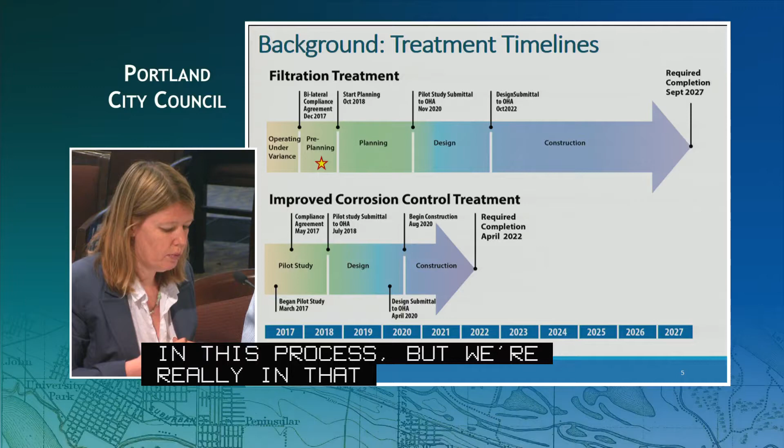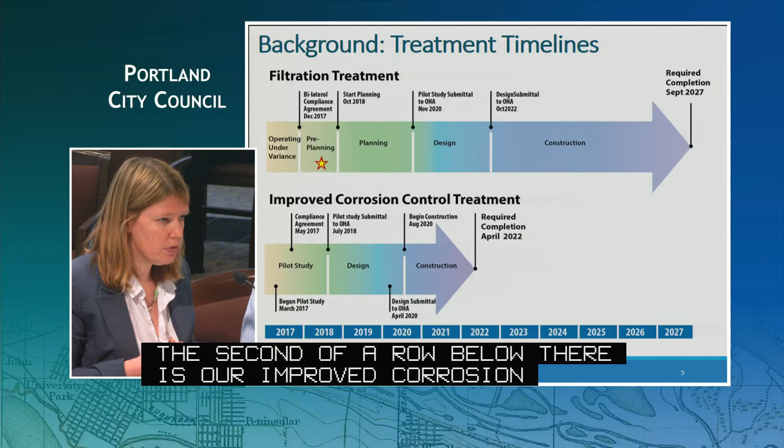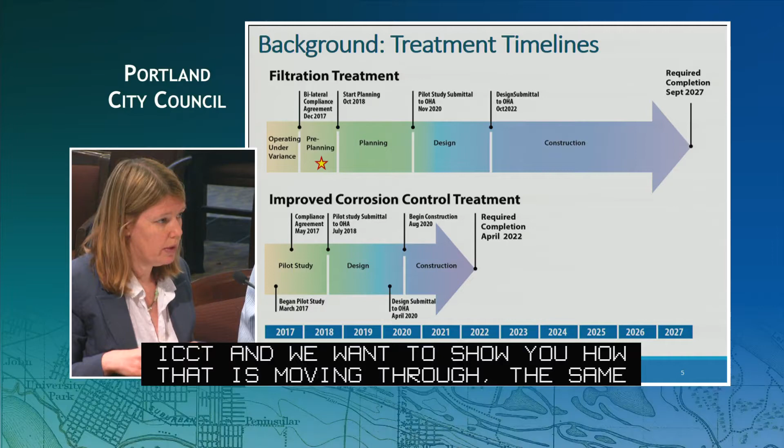The second arrow below there is our improved corrosion control treatment. We usually say ICCT. We just wanted to show you how that is moving through the same process, as a pilot, the design, the construction, but that completion with our compliance agreement is April of 2022. So the two are moving in concert.

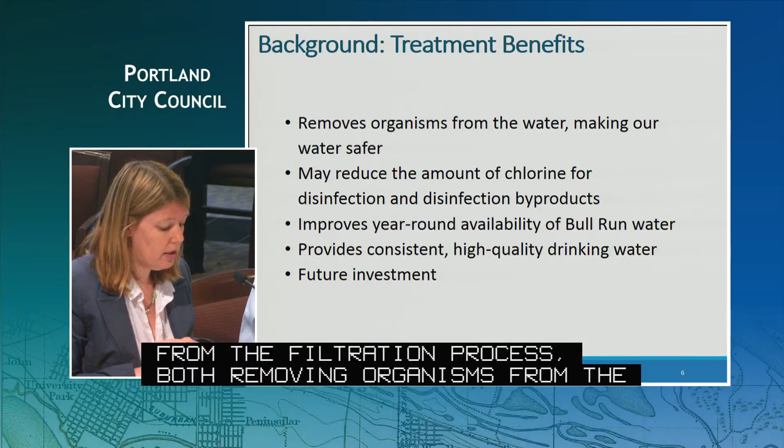And we'll go forward. Again, just a little reminder on the next slide about the treatment benefits. So yes, we are complying, and that is a huge reason why we are moving forward with filtration. But as the council considered last year, there are also a number of benefits that we get from the filtration process, both removing organisms from the water, but also the amount of chlorine that we may need for disinfection, and then as a result, the disinfection byproducts.

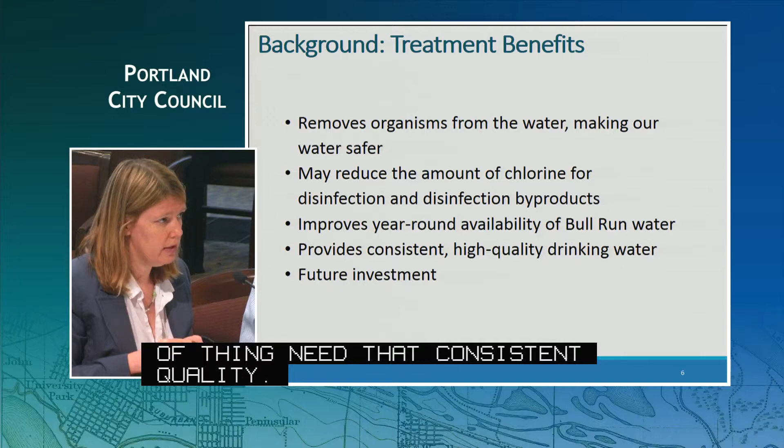We're also looking at filtration. It will improve the availability of Bull Run water. It won't make more water. We want to be clear about that, but it will allow us access more of the year during different conditions. And the consistency of the water, which is important to all of our customers, but also to a lot of our high volume customers who use this water for chip manufacture and that kind of thing need that consistent quality. And it's a future investment, and as the mayor said last year, we are looking at a longer time horizon than with any other treatment option. So that's what brought us to the filtration option.

Now I just wanted to go through a little bit of what we've been doing through the last year. We'll talk a little bit about outreach and engagement. That was a huge focus for us in the lead up to this process, and the team and the tools that we've assembled to help us on this journey. And then Dave will talk a little bit about the 4 alternatives that the commissioner mentioned.

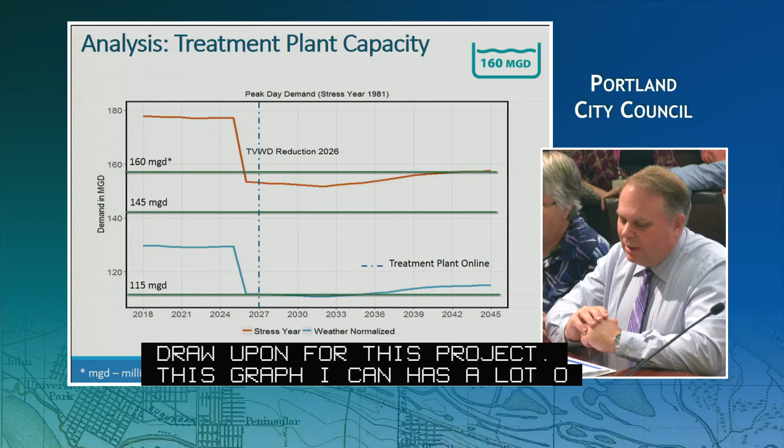So in treatment plant capacity, this graphic has a lot of information on it, and so I'll do my best to explain what's here. But we evaluated 5 alternatives for capacity. 2 of them are not shown on this graphic, and those are the min and max of the range that we would consider.

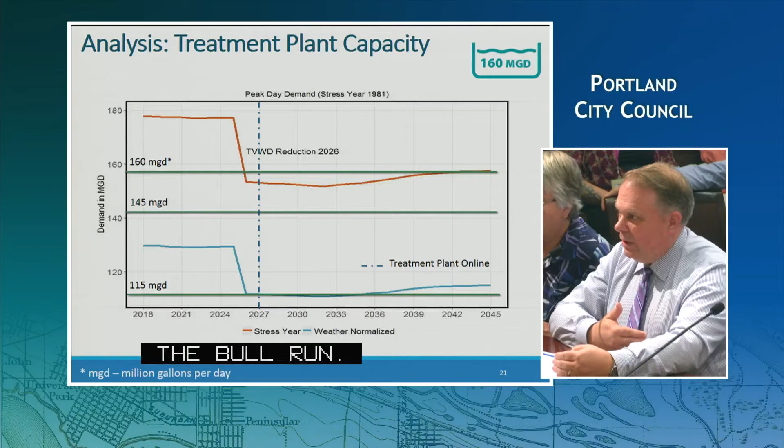The maximum is 200 million gallons a day, or MGD from here on out, is the current capacity of our existing conduits coming from the Bull Run. The lower end of our boundary that we evaluated is 100 MGD, which is about an average day in the city of Portland throughout the course of the full year. But to get to 100 MGD during the summer, we're over that average day and would have to run groundwater a lot more than we do today.

So we narrowed the range down, and the 3 alternatives that we moved forward in our evaluation are 160 MGD, 145 MGD, and 115 MGD. Those are the horizontal lines going across the page, and they're superimposed on an orange and a blue line that are our demands in the future. So this is what our demand pattern, or what we expect our demand pattern to look like as we move into the future. The blue line is a normal year, and the orange or red line is what we call a stress year. So we can anticipate that when we have a dry year, demands can be higher.

The dotted line down the middle of the graph is 2027, which is when our plant will be coming online. You'll see a steep drop in each of these demand curves, and that indicates when we anticipate one of our large wholesalers coming off our system, because they're currently building their own facilities.

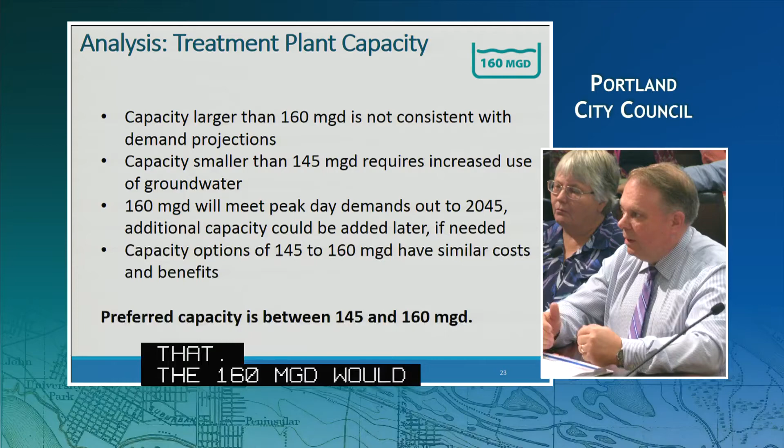The 160 MGD will meet our peak day demands in the planning period out through 2045 in this case. And we can set facilities of this type up with the ability to expand that capacity later if need be.

How would you do that? There's multiple ways. One would be construction of additional modular basins. Another way would be to design for a certain flow rate through that system and ask to increase that flow rate in the future.

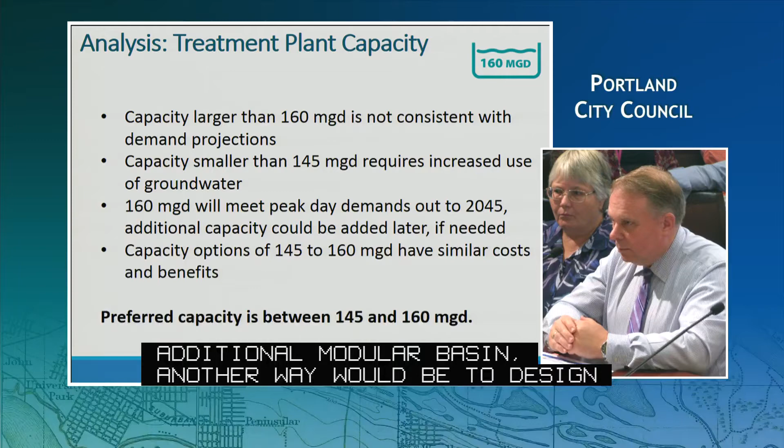So are those major overhauls, or are they minor? Give us, if we're sitting here in 2045, what are we looking at in terms of the scope of what would be required to increase the capacity?

2045 is a long ways away. I used to think so. I know. It is a long ways away.

One of the things all water utilities have experienced in the last 20 years is that our public and our codes have consistently reduced water use. It's flat, so we don't expect any huge increase. It would depend upon what happened in Portland. The city of Portland right now is fairly well built out. I think the numbers we picked would carry us through 2045. What could happen then would be a substantial investment depending on how much you had to add, but from a technical point of view, it's pretty easy to do. I would not want to overbuild a plant right now, so I think we have a solid number and there's a technical way to deal with it, and it's very difficult to predict that far out.

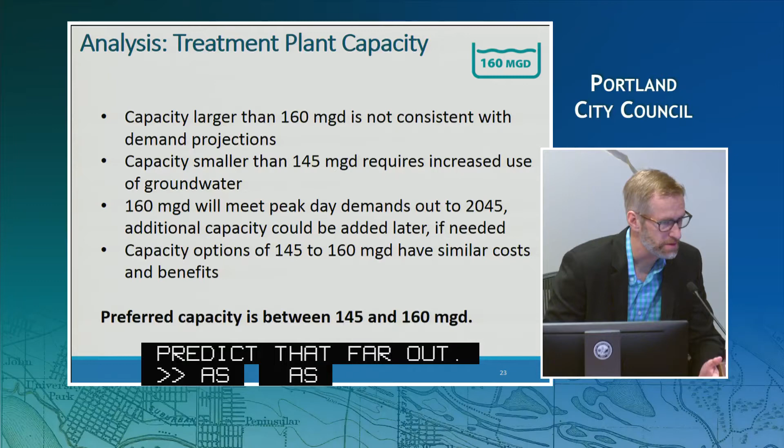As far as additional pools, or whatever you describe them as, we're not geographically constrained there, are we? No, we have 95 acres there. Oh, that's great. It takes about 35 acres to actually build what I'm imagining this thing will be. We're also hoping to work out some energy conservation things like a solar field to make it more energy neutral, but we have plenty of real estate to work with up there.

And key, proper zoning.

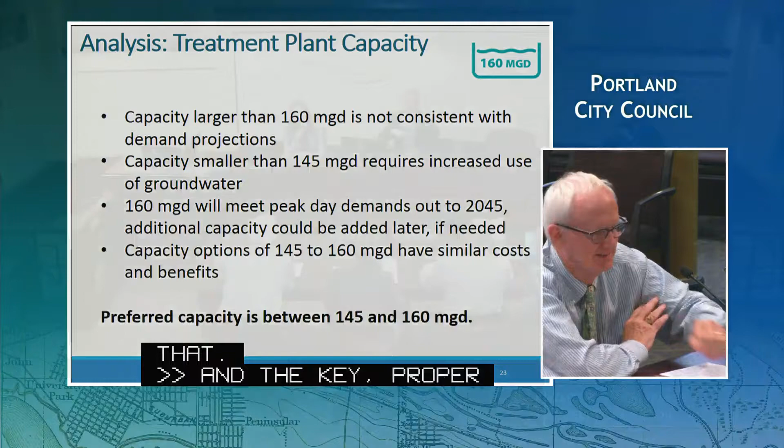He's jumping ahead, but we're getting ahead of ourselves now. Yes, jumping ahead now. Sorry. So just to finish up quickly on the capacity then.

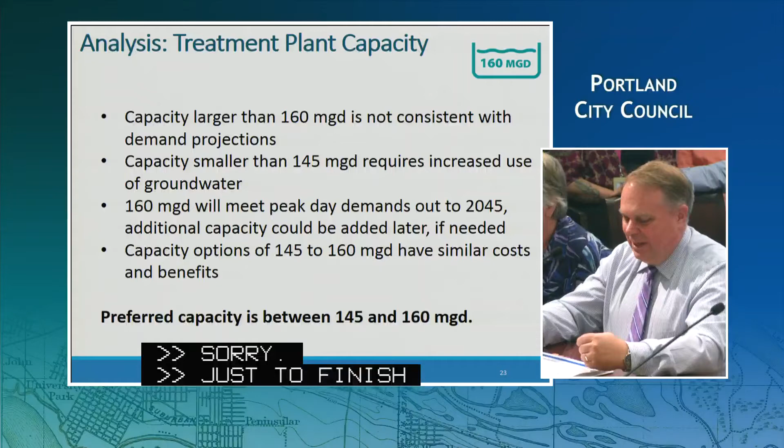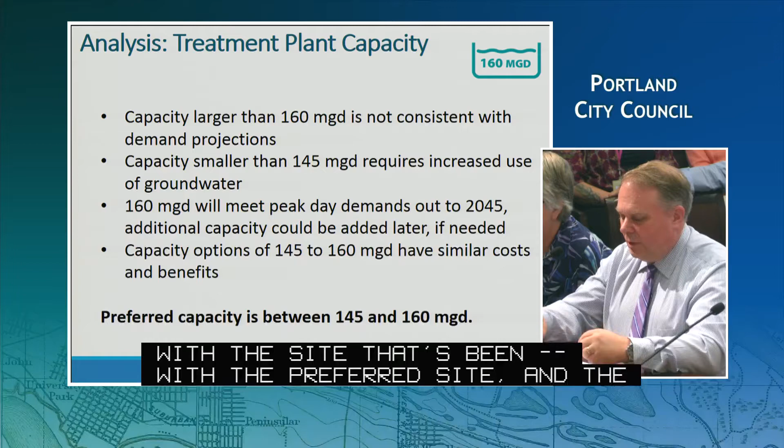Our preferred alternative would be to have a range at this point in time between 145 and 160 MGD. Both the 145 and the 160 alternatives had similar costs and benefits, and the thought is that having a range at this point will allow us to do the further evaluations necessary with the preferred site and the preferred technology to work out the details and come up with one final number between that range when we're done.

We've taken those sites, ranging from our headworks facilities in the Bull Run watershed, to a second one, Larson's Ranch, also in the watershed. Roslyn Lake has served water to that facility in the past and has some infrastructure already there. Carpenter Lane was purchased by the Water Bureau specifically for storage and treatment several decades ago. Lusted Hill would be near our existing facilities, and then all the way into town, potentially with Powell Butte.

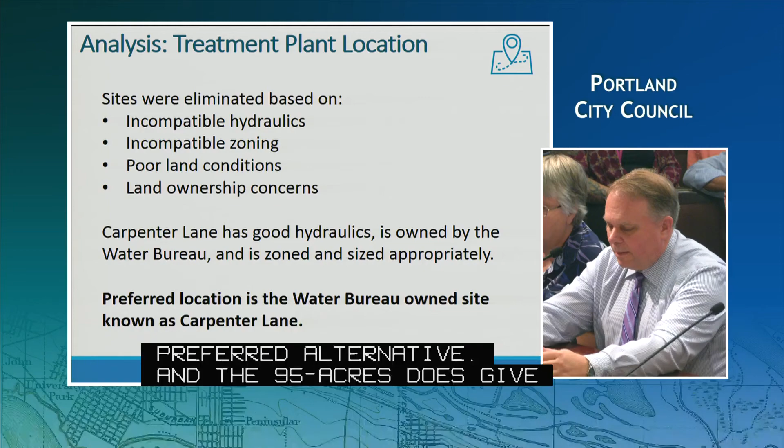Moving into treatment plant technology, there are three filtration technologies used in North America on facilities over 50 million gallons a day in size: membrane filtration, slow sand filtration, and granular media filtration. I'll walk through each one in more detail now.

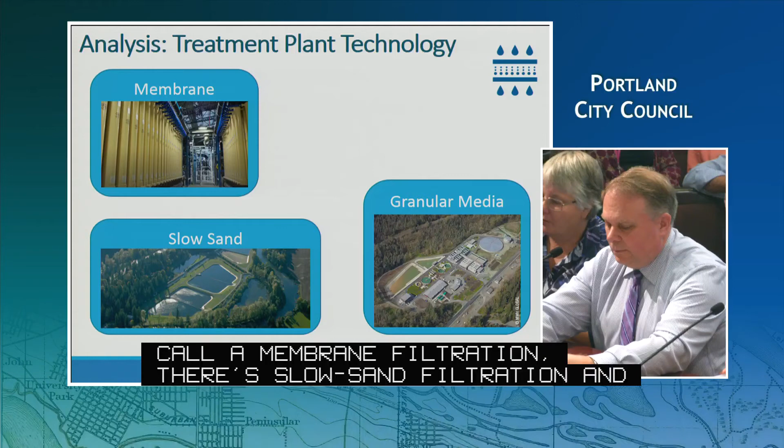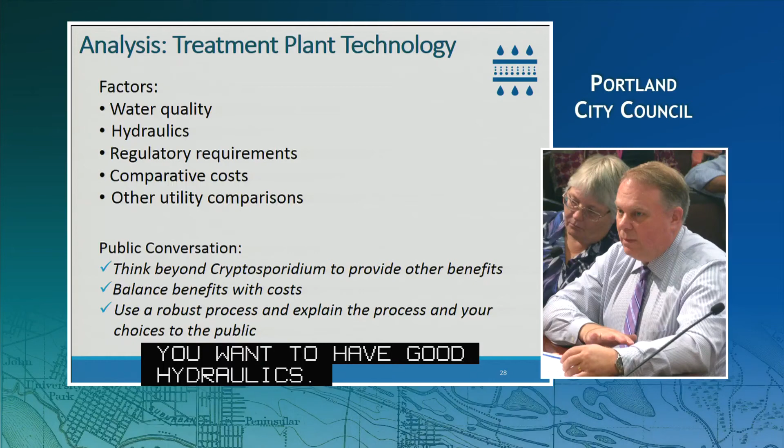But before we do that, in all of these filtration alternatives, the factors we took into account are water quality — what capabilities they have for our raw water quality, and what the finished water quality is. We looked at hydraulics, because to maintain gravity capacity you want good hydraulics. We looked at regulatory requirements — they all meet the rule, but some allow us to go beyond just basic regulatory requirements. We also looked at comparative costs, and what other utilities have done.

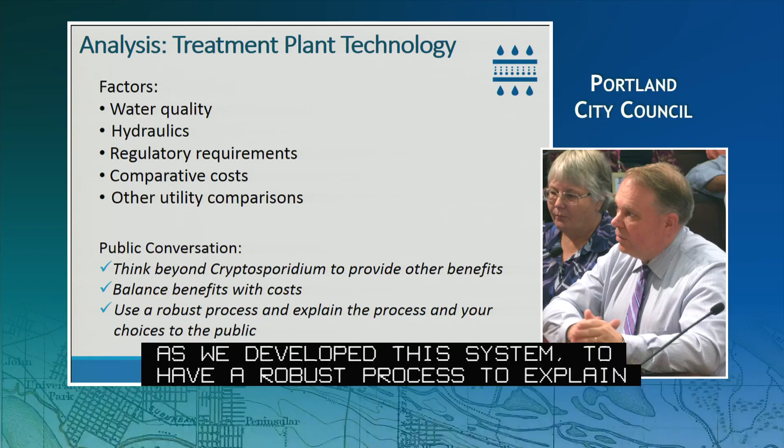What we heard from the public regarding technology is that they'd like us to think beyond just cryptosporidium, and I think that choice aligns with the decision made last year to go with filtration — we aren't choosing a technology that just solves for cryptosporidium. They asked us to balance the benefits with the costs, and as we develop this system, to have a robust process to explain our choices to the public, helping them understand the benefits they're receiving for the cost of the facilities.

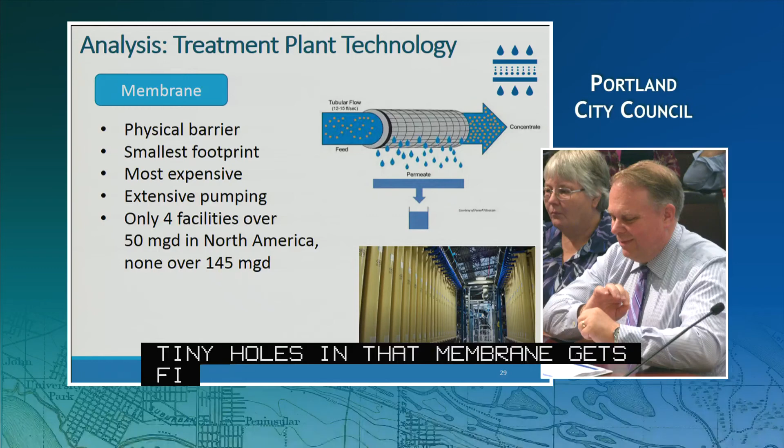So in regards to membrane filtration, a membrane filter is a physical barrier. It's actually a small tube, looks like a straw, only smaller, that has lots of little tiny holes. Anything larger than the tiny holes gets filtered out. If it can't get through, only the water goes through. The larger stuff gets filtered away and taken away.

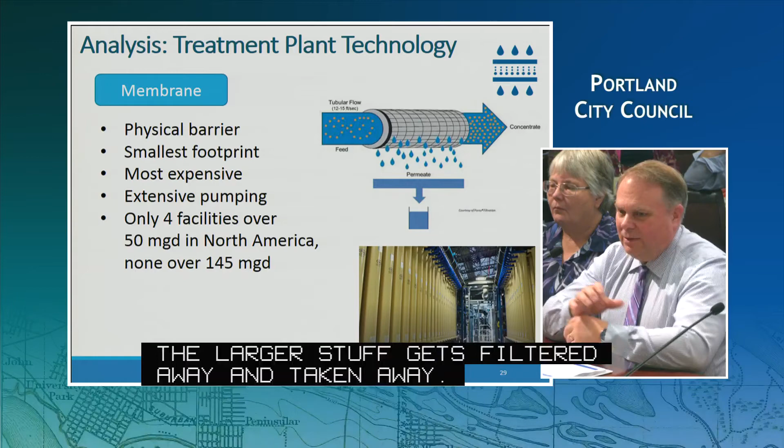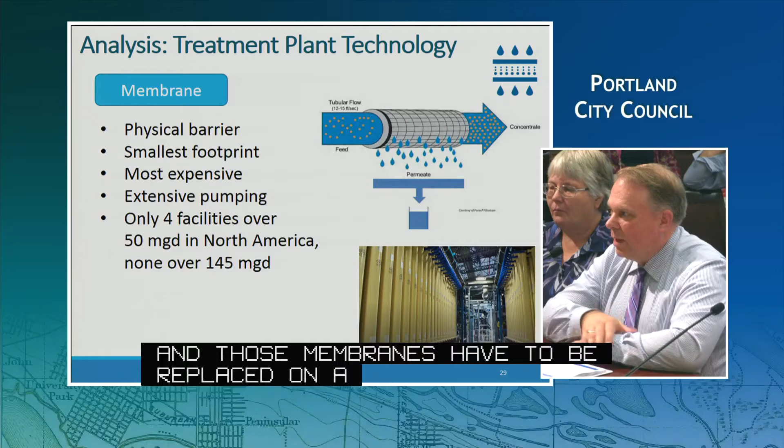The picture in the lower right is a canister that has hundreds of those little tubes or membranes in it. They're compact. This membrane filter would have the smallest footprint of all the technologies, but it's the most expensive. It has the most equipment, and those membranes have to be replaced on a periodic basis. It's also expensive from an operating standpoint because you have to be pumping your water all the time to get it through the filters.

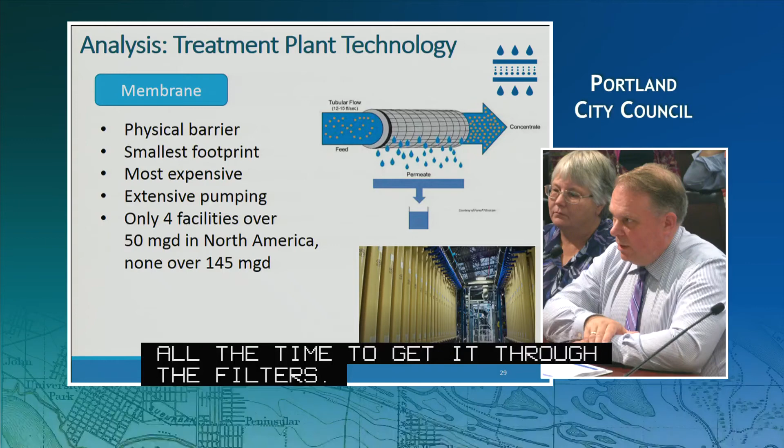There's only 4 facilities in North America that are over 50 million gallons a day in size, and none of those are over 145 million gallons a day. The largest one in North America is actually up in Canada, at 132 million gallons a day. So they haven't advanced to be a large size yet.

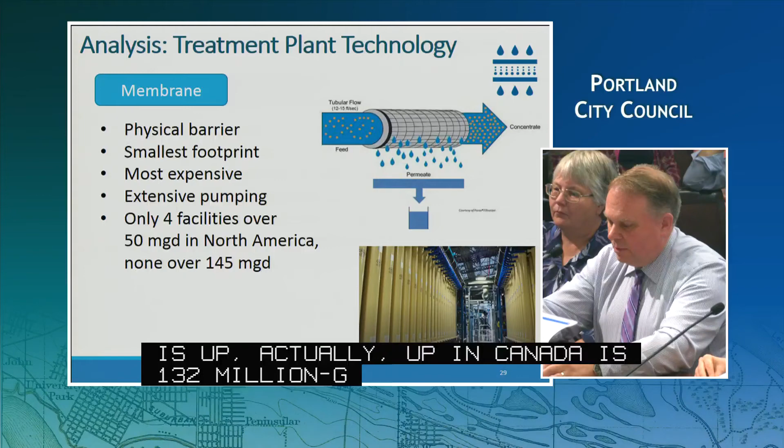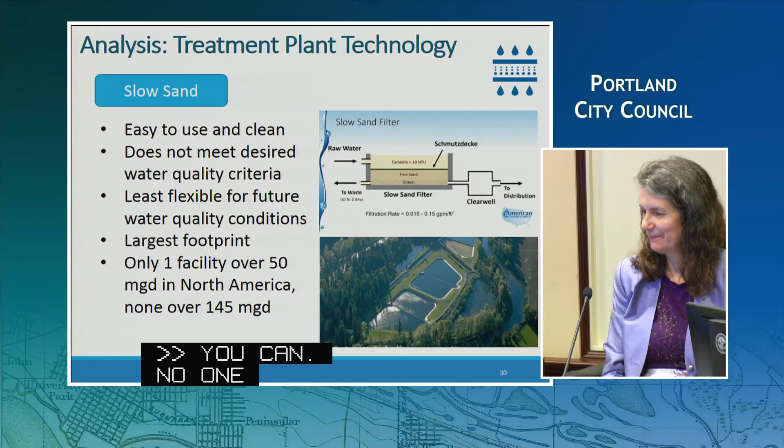Why is it difficult to have a big one? I mean, why couldn't you just add some more of those tubes? You can. No one's done it yet. They are very modular in that regard, but it just comes with more equipment.

The slow sand filtration. This is a very simple system. You have sand in a basin, and you run the water through the sand. This is very easy to use and easy to clean. What happens with this slow sand filter is there's a biological layer that forms on the top of the sand, called a Schmutzdecke, and that's what provides your treatment.

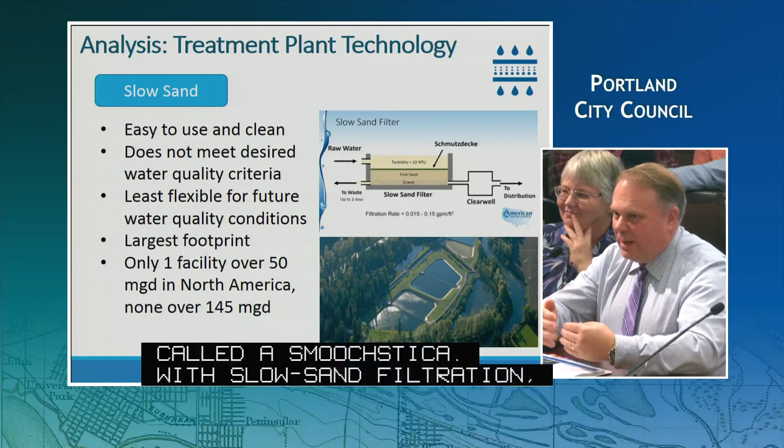With slow sand filtration, it meets the regulatory requirements, but we've talked a lot about having the ability to be flexible and deal with changing water qualities in the future. This would be the least flexible in being able to achieve that. It would also have the largest footprint, and initial estimates indicate that we may not have enough property on the chosen site to handle a facility of our size.

There's only one facility over 50 million gallons a day in North America, and it's right at 50 million gallons a day. A lot of that is related to just the amount of property that you would need to operate a facility of that size.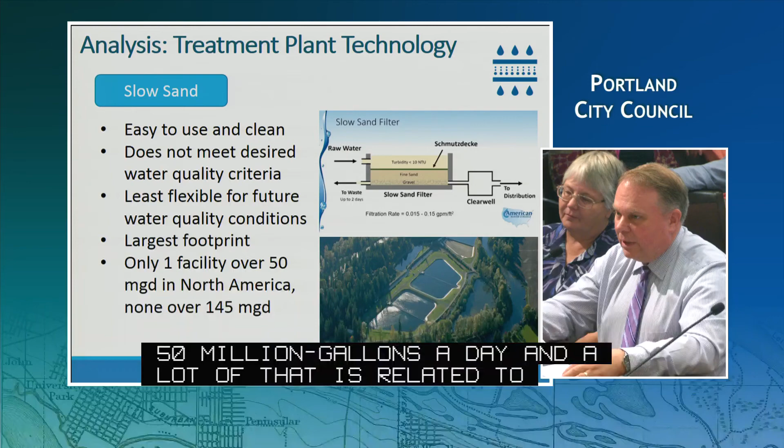And then in regards to granular media, it's simple also. It's a sand filter. You just run the water through the sand at a much higher rate than you do with slow sand filtration. So it allows you to have a smaller footprint. And there's a way to keep that sand clean.

146 of the 157 treatment plants in North America that are larger than 50 million gallons a day use a form of granular media filtration. About 40% of those are larger than 145 million gallons a day. The largest one is in Chicago and is nearly 1 billion gallons a day treated at that site.

This technology would be the most adaptable to any changes in water quality in the future, and it has a moderate footprint and moderate cost.

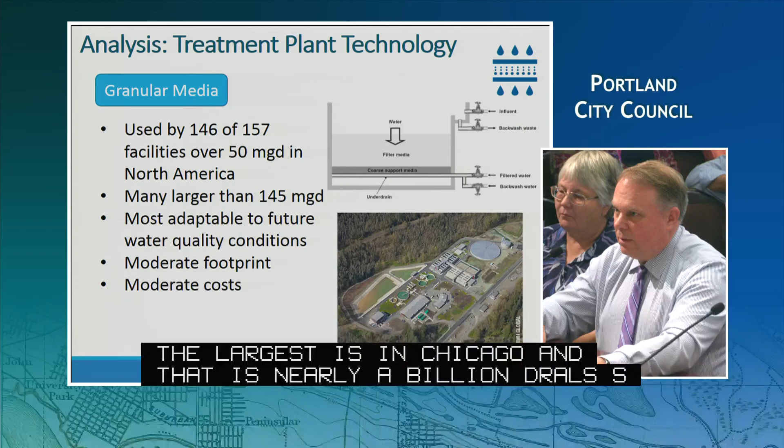So when it came to the evaluation to get to a preferred technology, this is a high-level overview. There's a lot more that went into this choice, but generally, membranes are high energy use and have high capital and operating costs. Both the energy and the operating costs are related to the pumping required for that system.

Slow sand just has significant size, and relative to the other two technologies, comparatively poor water quality. And then with granular media, it has the best operating capabilities. It provides a good, stable water quality, and would be the most flexible for managing into the future.

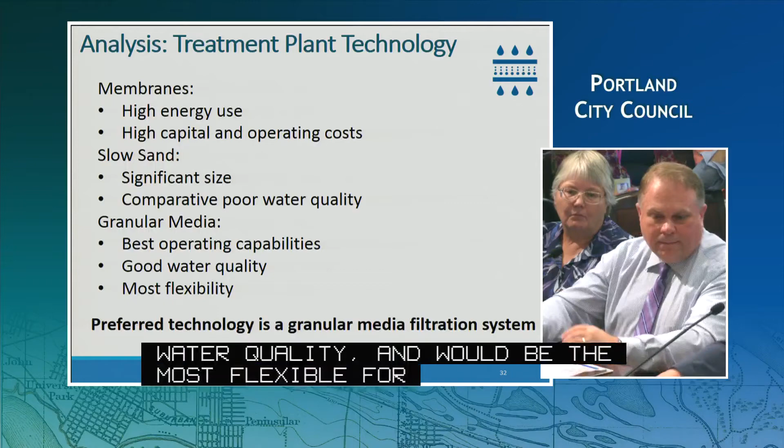Just one comment there. We presented the same information to the Portland Utility Board, their PUB oversight group, last week, and they had some very good comments on this process and our analysis. One of the things they pointed out is that you can see each of these types of filtration within 10 miles of here. Not at the same scale or scope we would be considering, but our team has gone out and looked at these in the area so we can really get a sense of why those decisions were made by people who have a lot of the same local constraints and issues. So it was a helpful reminder from us and a good reason why we talk to our stakeholders and to our PUB.

So that's the overview of the alternatives to get to our preferred alternatives. At this point, I'll take a few slides to go through some of our next steps and near-term activities.

On the project, there are several moving parts to stay on schedule and get this done in 9 years. One step we took recently was to submit a letter of interest to the Water Infrastructure Finance and Innovation Act, commonly known as WIFIA, a federal program offering low-interest financing for large water infrastructure projects throughout the U.S. Up to 49% of the project value could be obtained through this program. We submitted a letter of interest to be considered for that. Dave, let's acknowledge that a copy of the letter from the delegation to the administrator of the program is tab 6 in the packet we have.

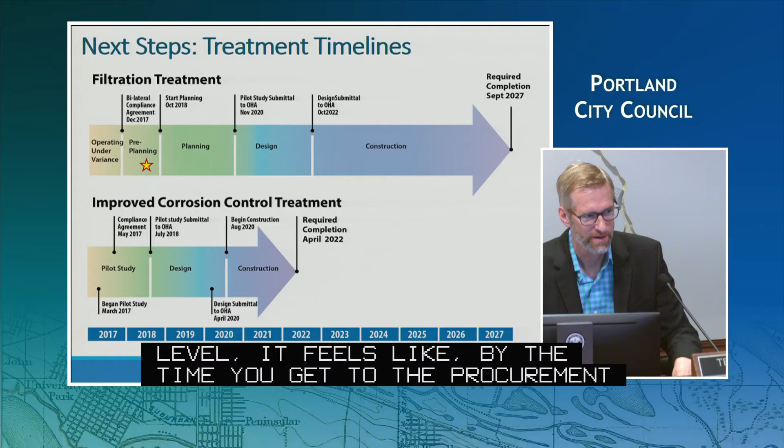So this next slide—can I ask a question about the methodology? Given that, and I'm no great expert on these kinds of systems, but given that you have to do the pilot study, then scope it out, then have a technical review at the state level, it feels like by the time you get to the procurement process you already have a pretty good idea of what it is you want built, don't you? Doesn't that reduce some of the value of CMGC?

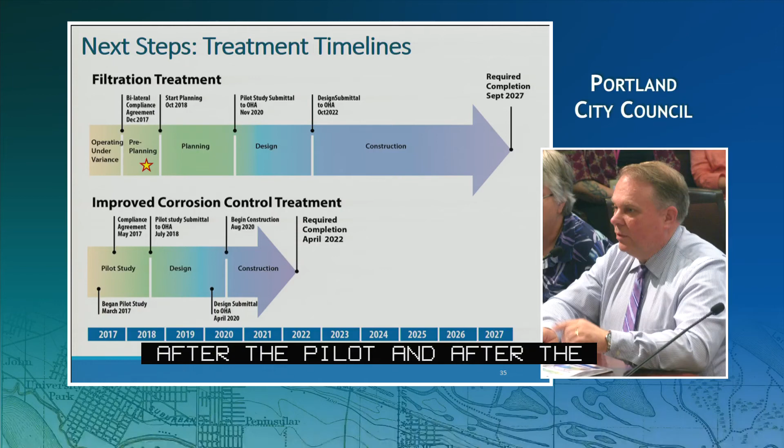No. The reason we have a pretty good idea of what we'll build is because we've had the input from the designer and the contractor to get to that point. So at what point do they come on board, then? Because the way I read the last slide, it seems like they come on after the pilot, after the scoping, and after the state review. Am I incorrect about that? Both the designer and the contractor should be on board before we submit to the state in 2020. Very good, thank you.

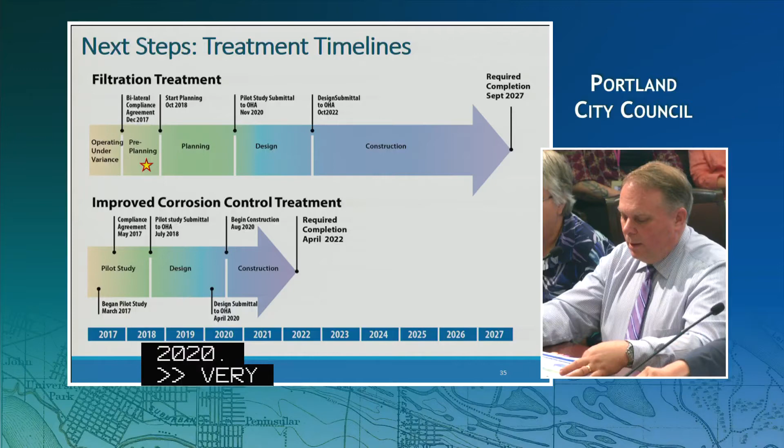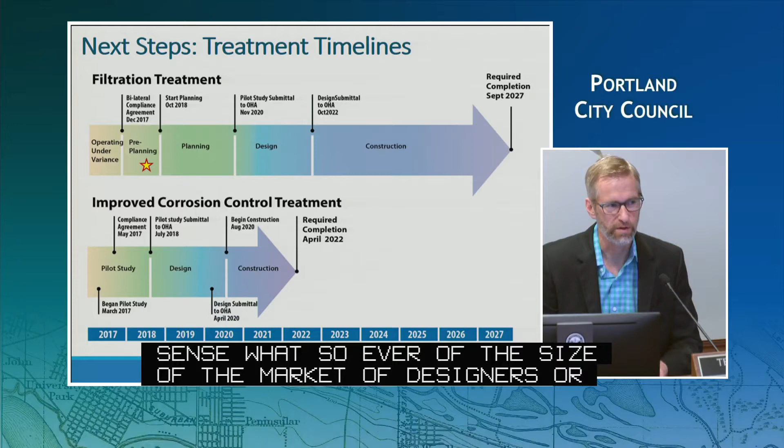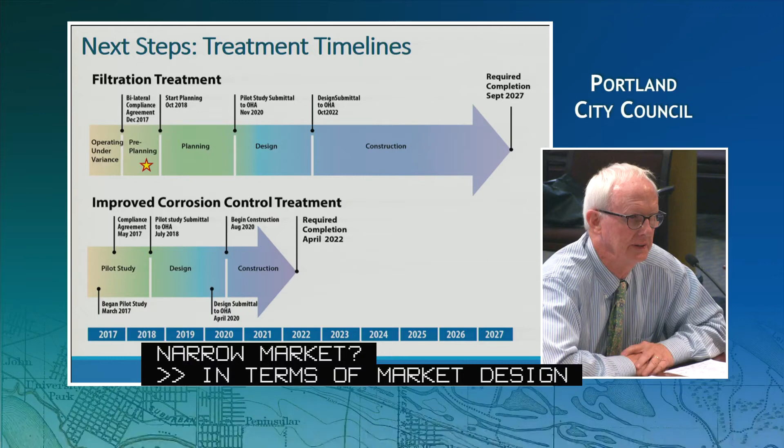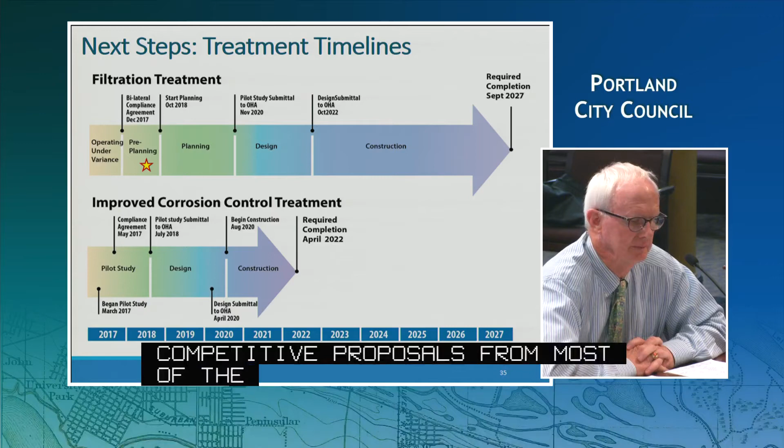I don't have any sense of the size of the market of designers or contractors for this kind of facility. Is that a broad market or a narrow market? In terms of design contracts, basically all the big players will be interested. I expect we'll get very competitive proposals from most of the major contractors. In terms of construction contractors, there are a lot. While it's a complicated, big facility, the construction is pretty standard—it's concrete and pipes.

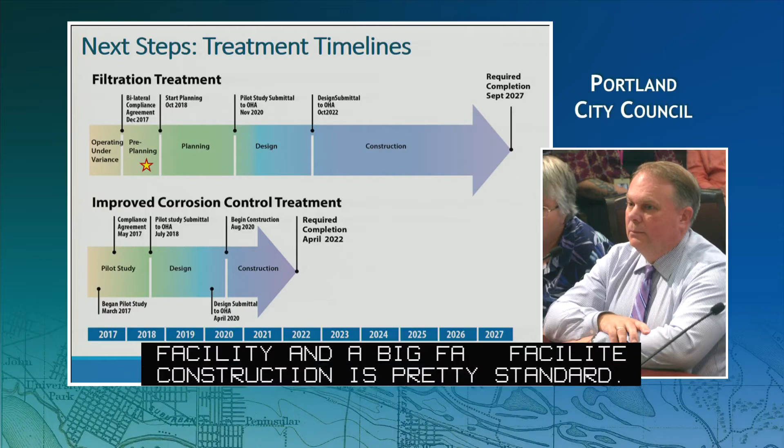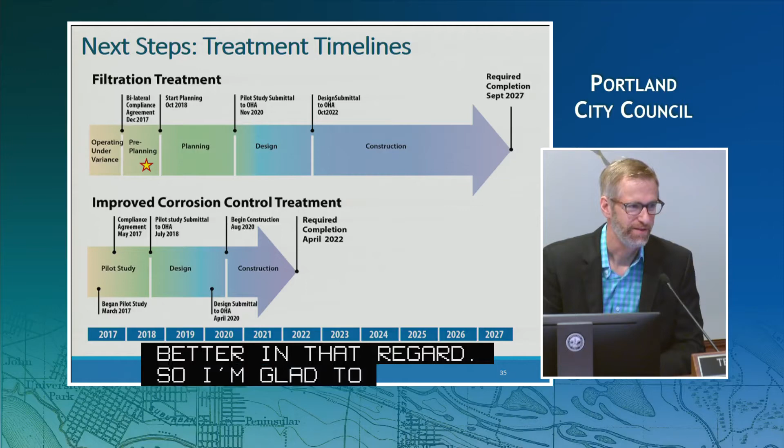As you know, one of the downsides to CMGC is the strong temptation to escalate costs up front, so the more interest there is, the better in that regard. I'm glad to hear that answer. I mean, if I might—not that I'll be micromanaging you.

If I might add to Mike's comment, as we did the RFP for the program management and support contract, we did an informational meeting in December of last year, and we had over 40 consulting firms attend. 13 were identified as potential prime contractors, and at that early planning stage we even had 3 contractors attend who were some of the bigger ones around town.

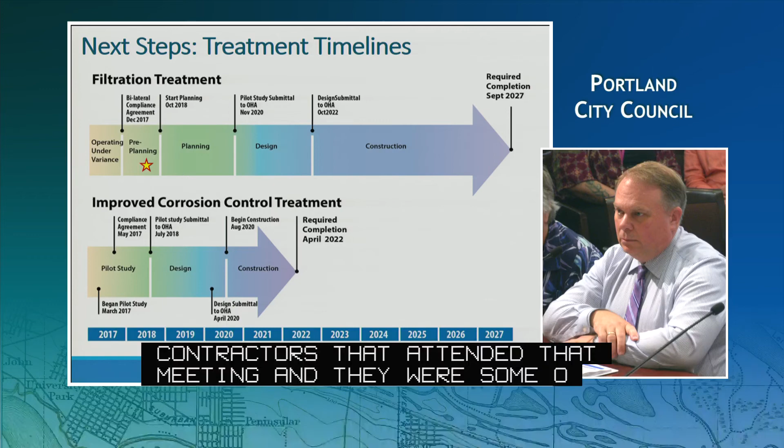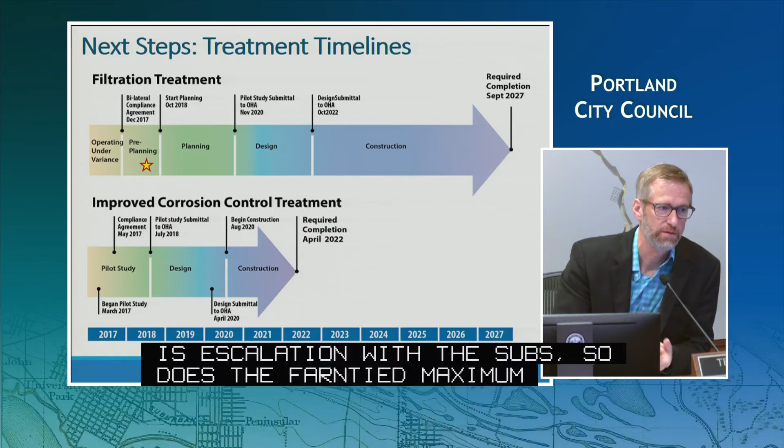So the problem we're running into in construction generally is escalation with the subs. Does the guaranteed maximum protect us against problems with subcontracting? Yes, it does, with a couple of exceptions.

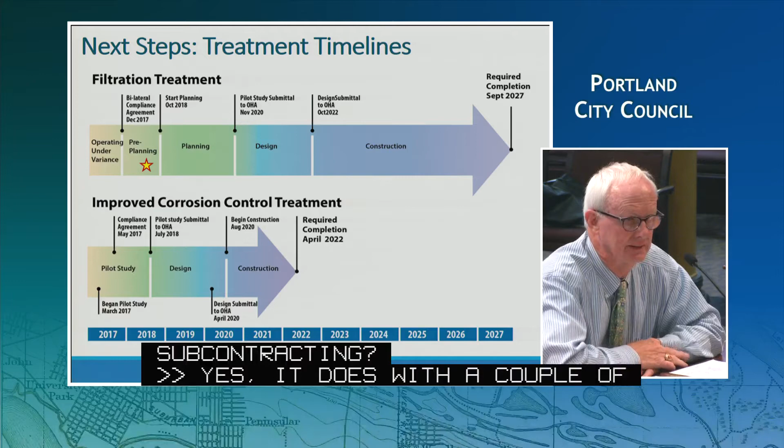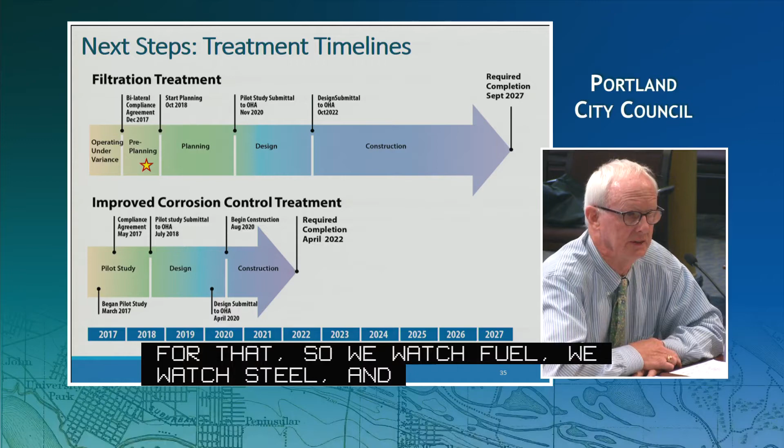Everybody reads the news here. We've got tariff problems, and that's affecting buying steel today and so on. We build escalation factors in for that. So we watch fuel, we watch steel, and in a larger sense, it's the fair and equitable thing to do with the contractors.

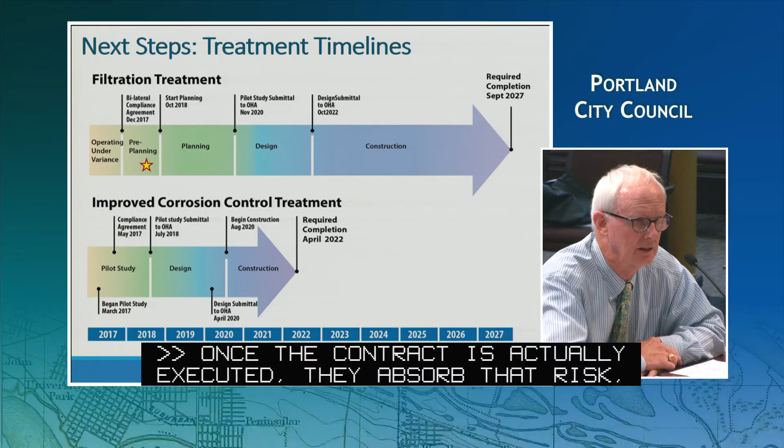But once the contract is actually executed, they absorb that risk, don't they? No, there are escalation clauses in the contract to cover fuel. Fuel's a really good example—fuel prices bounce up and down, and the contractor has no control over that.

One of the things you try to do, particularly in these large contracts, is share risk where it's to your benefit. If a contractor can't predict the risk, what they do is throw money at it, and it jacks your price up. So if you have something in the contract that you can identify and clearly outline down the road what the price structure may or may not be, you can reduce the price of your contracts by agreeing to share risk with a contractor.

And it's pretty well settled in the industry right now that we do fuel. Sometimes people do concrete because it's basically a fuel-driven activity, and certainly steel. I think all the city bureaus building big things right now are experiencing price increases in steel, partly the market and partly the blasted tariffs.

Definitely steel and subcontractors. So who takes the risk for labor? Because I assume you're getting close to some sort of a cost-plus model, and then you agree on what are the variables that nobody controls. But if there's a shortage of labor, who absorbs that cost?

Currently, it's actually— introduce yourself. I'm Teresa Elliott, Chief Engineer, Portland Water Bureau.

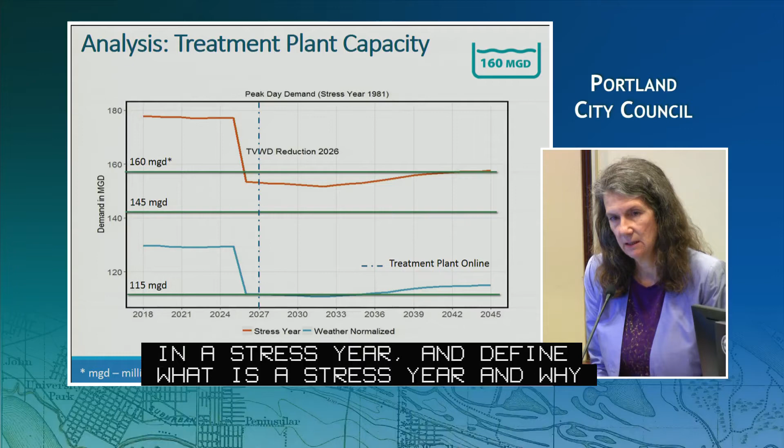So the blue line is just an average of all the data and the analyses. And then the stress year would look at a year where, like 2015, we had a really dry summer. That's an anomaly when you compare it to averages. And so this is an evaluation to try to account for those types of years that might come up.

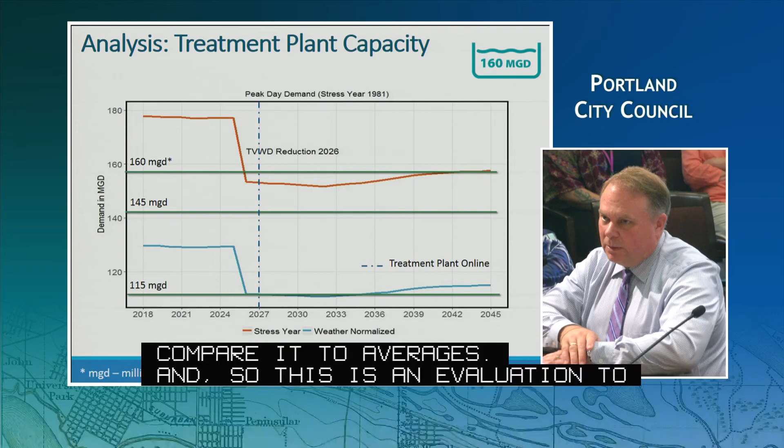What is it that causes more water use in a dry summer? One of the big deals, 2015 is a great example. Actually, this year is a great example. It's been quite dry this year, it's actually a better example, but it's not over yet, so it's kind of hard to use the annual data because it's not done.

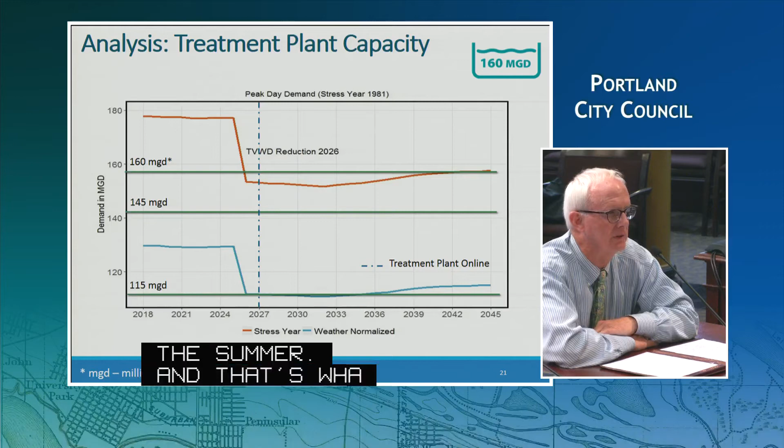The supply sort of depends upon where you start. In a normal year, even what I'll call a normal dry year, which is not this year, our reservoirs start full in May. And this year, they weren't. So you've got less volume of water to pedal. And in normal years, there's usually 1 or 2 big rainstorms in the summer. If we have like 4 days of rain, all of our problems are solved. I don't see 4 days of rain in the horizon. So it's not so much use per se. The use stays fairly stable unless we do something, curtail or something like that. But we don't have the volume that we usually have at the beginning of the summer. And that's what kind of a stress year is. We don't start off with the volume that we normally have. But this shows the peak day demand in million gallons per day, rather than what we've got left in the reservoir.

Commissioner, I think you were talking about what drives that demand, and as we've seen this year and in 2015, we look at those hot days when people are using more water. That could be for irrigation. A lot of our water is used outside, on watering property, both on the residential and commercial side. Is that what you're getting at?

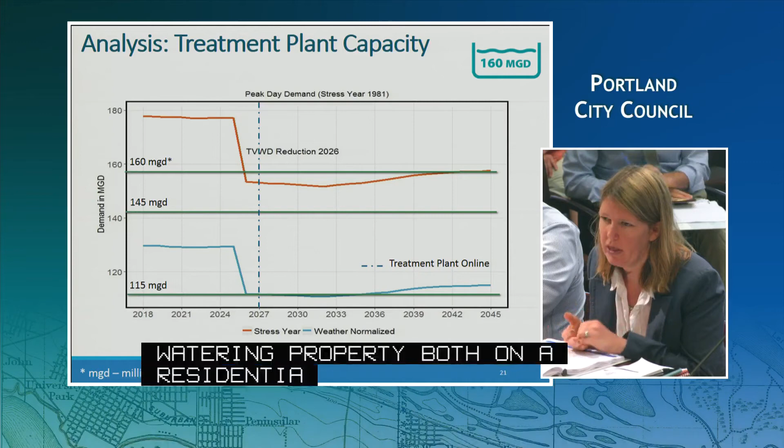Yeah, because I've actually been surprised that we haven't had a hosepipe ban this summer. My garden is happy about that, but I will be interested in getting more information about what's commercial use that's going to be necessary to irrigate the crops, etc., versus potentially optional use of whether or not my flowers die.

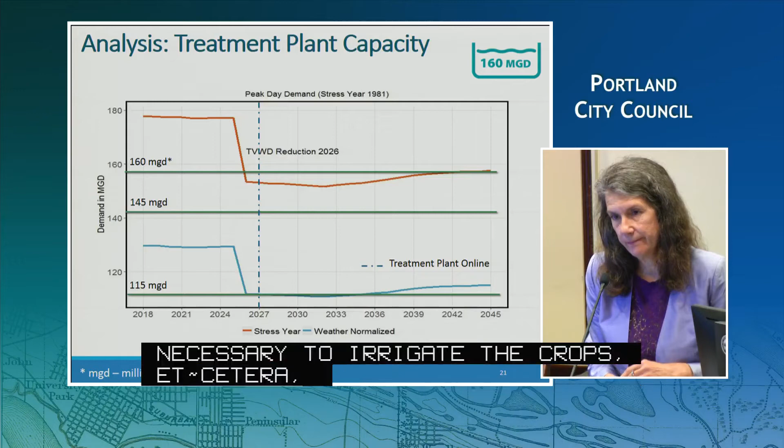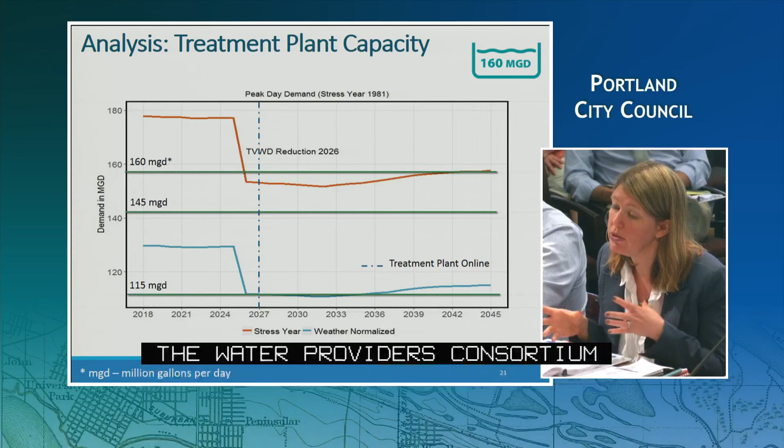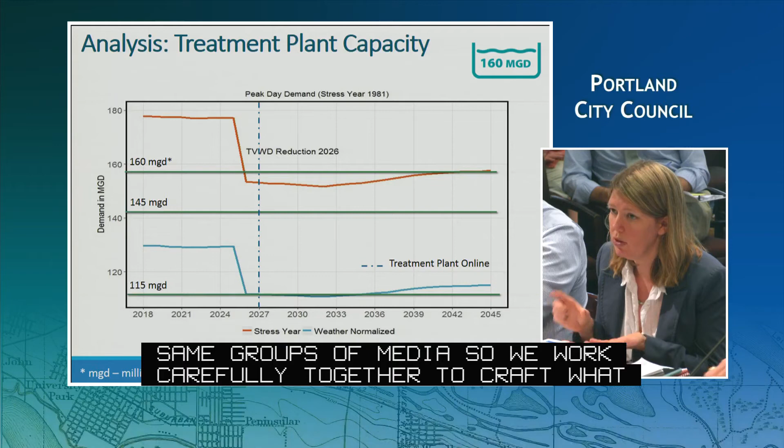Right, right. And we work a lot with our Regional Water Providers Consortium to make sure that, since Portland has one media market, that information, even though water sources are different within the Portland area, people are getting their information from the same groups of media. So we work carefully together to craft what does your garden need for this week? What does an inch of water look like? All of that information so people can make wise choices about their water use.

Yeah, because obviously one of the key questions is how much water are we going to treat? So I think that's really interesting.

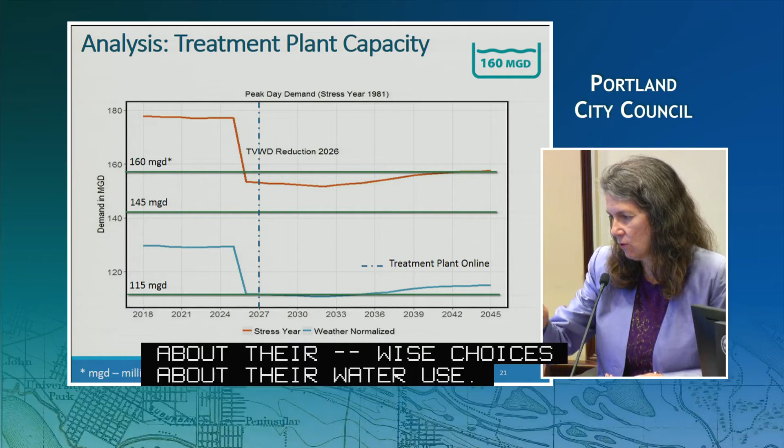Also noticing that from 2018 to '24, the line goes almost steady but down a bit, and that's what we've been seeing, isn't it? That people are conserving more, choosing not to water their flowers except when absolutely necessary, etc.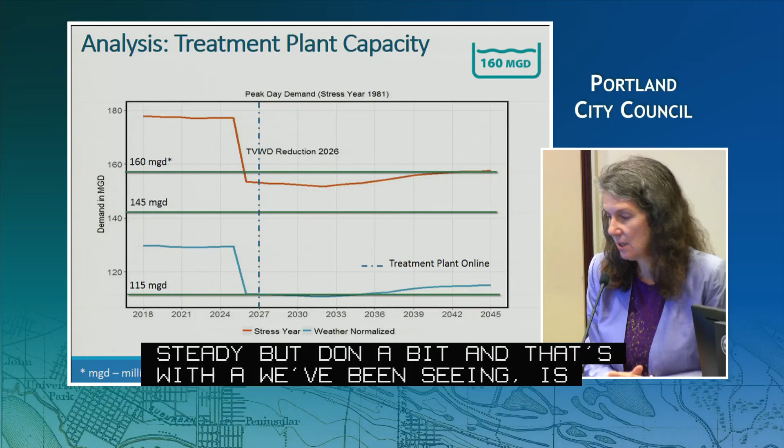I appreciate you explaining about the drop with Tualatin Valley getting their own water supply. Why is the line continuing to drop a little until 2033-ish and then going up after that?

So this is built on projection, so no one knows exactly what that will look like, but it's built on past demand and what we think in the future. Portland has been very fortunate that we've built more densely more recently, and so that dense building pattern uses less water than a sprawl type of pattern, and so we don't have that same pressure on demand. We also have a number of more efficient washers and items.

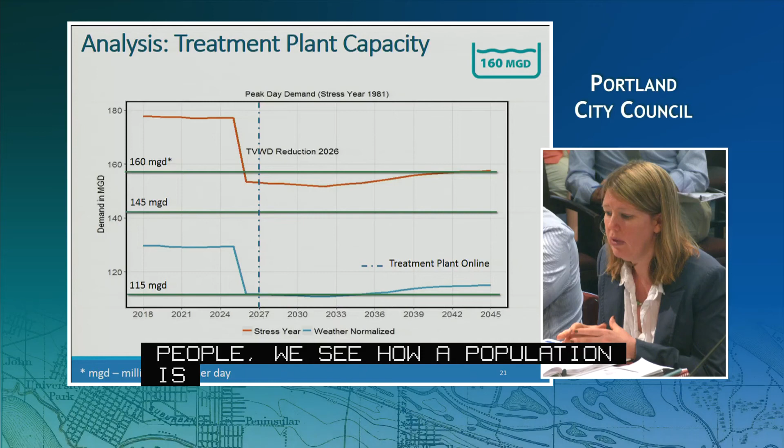Utilities that use water have become more efficient. I think we've seen the benefit of that over the past decade, and so at some point you can't get more efficient than we are, so then you see it start to creep up as the population increases, but very minimally. I think that's sometimes a surprise to people. We see how our population is increasing, we would think demand is going to take off, but really that is constrained by the pattern of building that we see here. Thank you.

May I ask a related question? Our long-term business plan historically has depended on or has favored the idea that we would sell more water. In a perfect world, TVWD would not be coming out of the system. We'd be selling more water because there are times during the year where we have more water than we can possibly use.

When the reservoir gets down to a certain level, we of course shift to a blend of well water and reservoir water. But if the way that we manage cost over time is to sell more water, one of the variables here that's almost impossible to predict is how successful will we be selling more water regionally, correct?

Correct. I mean, TVWD has decided to go down this path where they're going to make an extraordinary investment in an alternative water supply that may or may not be a good bet. The supply of water that they're pulling from is a heavily regulated river. The infrastructure investment is enormous. That may or may not be the best option for their ratepayers.

But we, as a utility, are always looking to expand our customer base, and that includes regionally. So it seems to me it's another example of where it's hard to predict where that orange line is going to go. But if we are serious about stabilizing rates over time, we're going to want to sell more water. So just food for thought.